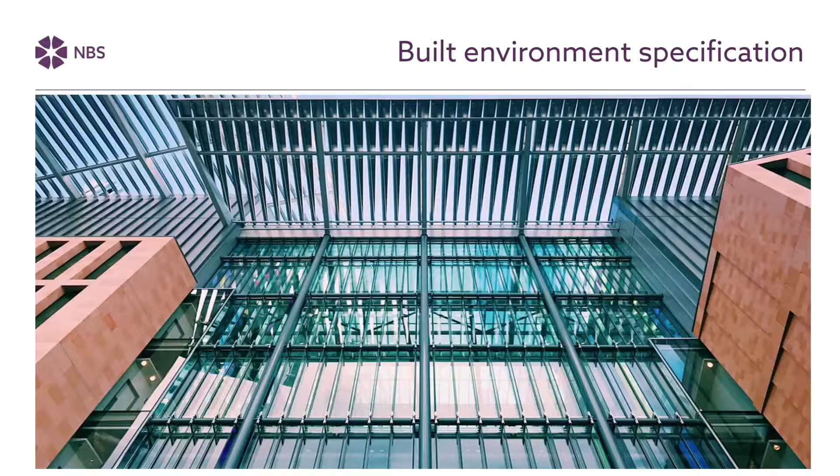For the built environment, the specification is most often a document, but is increasingly now a data model or a database connected to model information, helping to ensure that the constructed entity - which could be a building, but could be another kind of asset like a park, a tunnel, a bridge, even an art installation - is of suitable quality and meets the expected design intent.

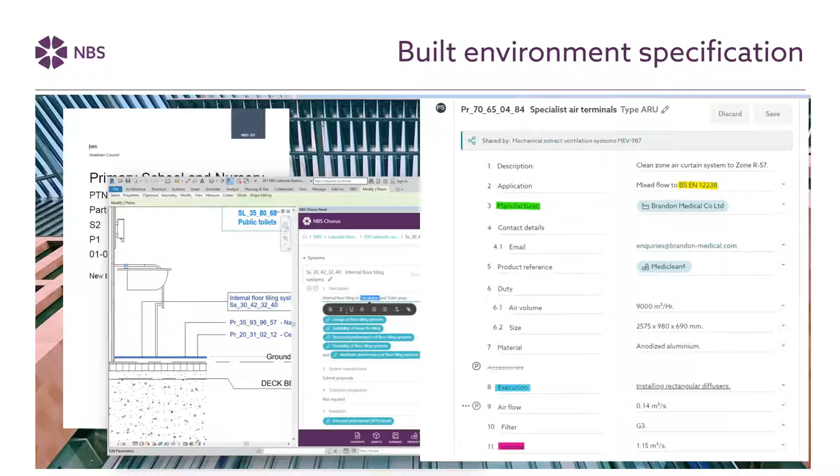The specification defines products and materials to be used, the standard of work required, any performance requirements that need to be met, and the conditions for carrying out the works. Ideally, it should be developed in parallel with the rest of the design process, not just part of the completed design, but forming part of the contractual and handover information for the rest of the project.

So that might describe what a specification is, but it's also worth noting what a specification does not include. The project specification is a written description, and as such, in most cases, it does not include graphical or geometric information. This is best represented in drawings and models in combination with the spec.

John Gelder, in his book Specifying Architecture, calls this the components of the description of the works, and suggests that almost always both graphical and non-graphical information is necessary. The text information provides the definition of quality and process, and the drawn information the quantities, position, assembly, and extent. Often on small projects, drawings used to be annotated, almost like a replacement of the specification, but this is impossible for larger projects, and even on small projects it's really difficult to keep things updated as things change.

Nor does the specification generally include information on quantities of materials, variants of many repeated items like fan coil units or louvers, which are better expressed in schedules generated from the model information, and often bills of quantities or pricing reports provide cost data, so that tends not to be in the spec either.

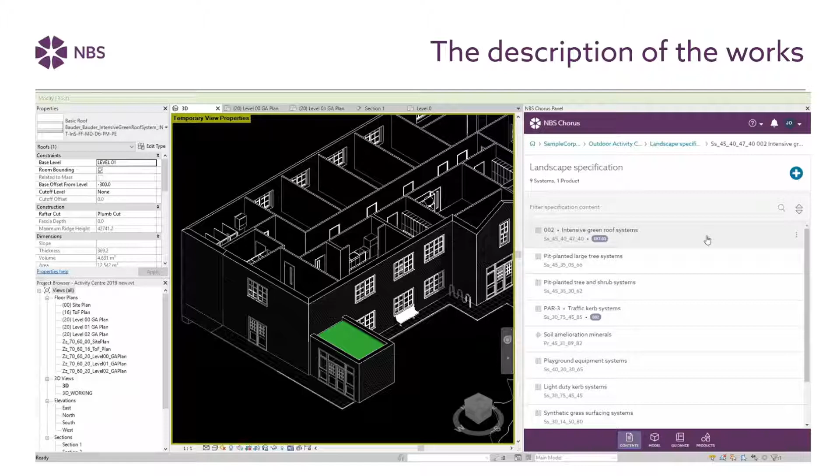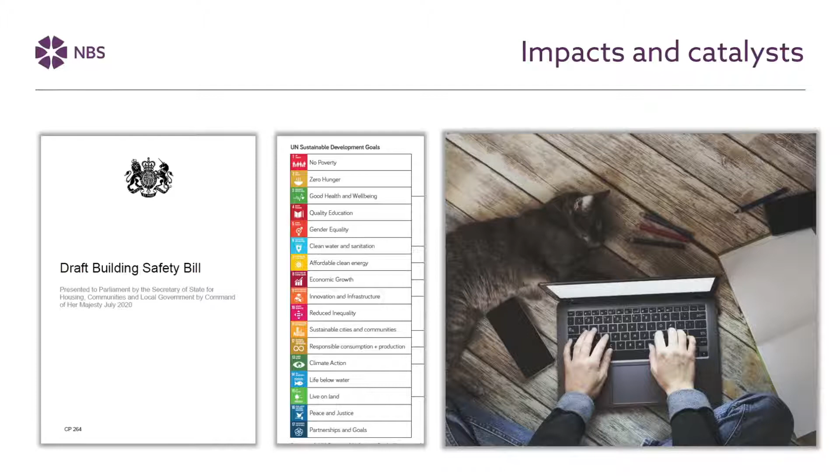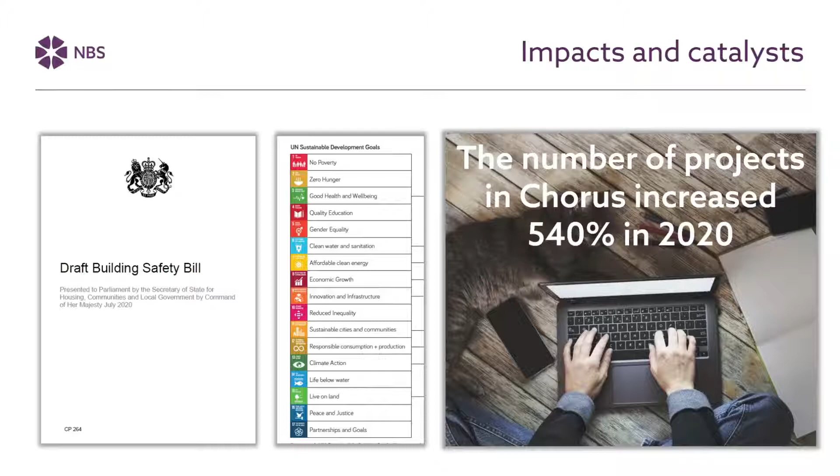There's always changing factors that impact and accelerate the work that NBS do, and recently regulations and mandates such as the draft Building Safety Bill, helping you to build safer and provide the golden thread of information, influence the content of NBS. Also, sustainability credentials, ensuring we provide standards and guidance on targets and requirements towards the sustainability goals, but also industry, society, carbon calculation, reducing cost and water consumption. And finally, digital transformation. There's been a real workplace evolution, and there was a huge increase in Chorus usage across 2020, working from home access being a major catalyst there.

So why are specifications so important? What can go wrong? In 2007, a luxury house in Jersey was demolished, having sat unused for 5 years. The building had failed to meet the owner's expectations, and the owner sued the contractor, the architect, the engineer, and the project manager for a catalogue of errors.

One of the significant issues raised was the lack of project documentation, in particular a written spec. As there was no written specification for the project, the architect was found to be liable for the failing and damages were sought. That's a major example of project documentation failure, but it helps to demonstrate the importance of a spec to ensure that the client's requirements are properly documented and met.

There's examples of significant building failures like this in a range of public sector and private projects up and down the country. Specifications are vital in times of dispute, but their fundamental purpose is to provide a clear and complete written description of the works as part of the contract.

And now there's even more urgency around improving various aspects of the building industry as a result of the London Grenfell Tower fire in June 2017, when 72 people lost their lives. This has brought a renewed, increased attention to specification, performance and quality.

And in the shadow of Grenfell, a major independent review and report, the Hackitt Report, was commissioned. That report, Building a Safer Future, concluded that the current system for ensuring fire safety, specifically in high-rise buildings, was not fit for purpose and recommended a full overhaul. And the government has accepted all 53 of those recommendations, and that has led towards the draft Building Safety Bill.

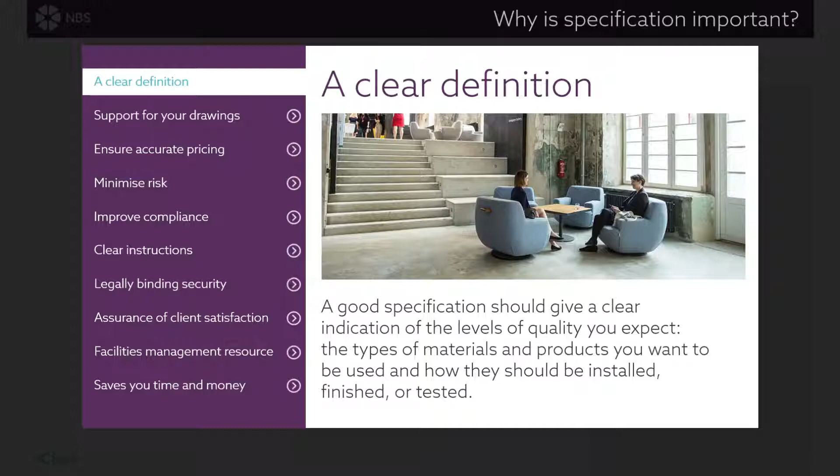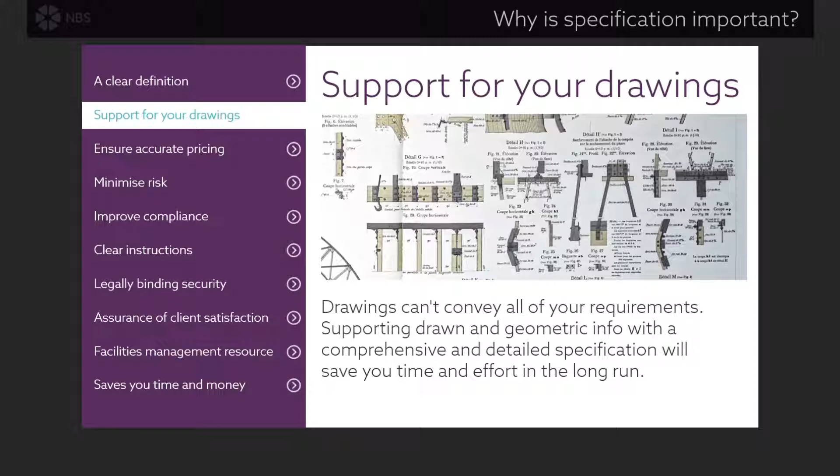Drawing info can't convey all of your requirements. Even on BIM projects using the latest platforms where fully rendered designs contain all kinds of information, only specification can capture the quality of materials, workmanship and installation, relevant standards that need to be met, and many aspects which are never modelled, like mortar, wall ties, brackets and joints.

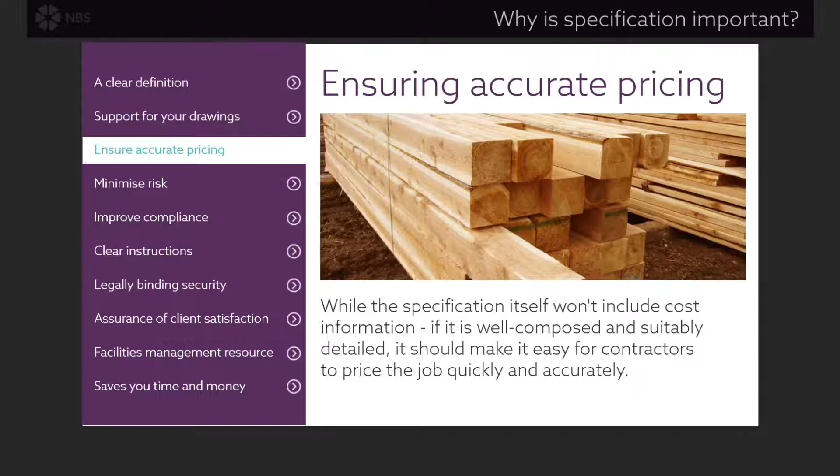Specifications shouldn't include cost information, but if well composed, structured and detailed, it's easy for a QS or contractor to price the job quickly and accurately. Expectations on performance and minimum levels to be achieved result in more accurate pricing down the line. If you can make reference to specific local standards or testing that are applicable to the job, they could impact cost too.

Performance and quality can be cross-checked against the latest standards. If you're not keeping the specification references up to date or coordinating the model information, it becomes easier to challenge it and harder to enforce.

Also, it has been tempting for organisations in the past to provide specs full of general clauses from previous projects or the whole of NBS content as a perceived safety net or catch-all. NBS templates are designed to be adapted, parked, edited, removed for the specific needs of your project. It makes no more sense to keep in clauses that you don't need or to understand than to send drawings of every detail you've ever designed. If in doubt, leave it out.

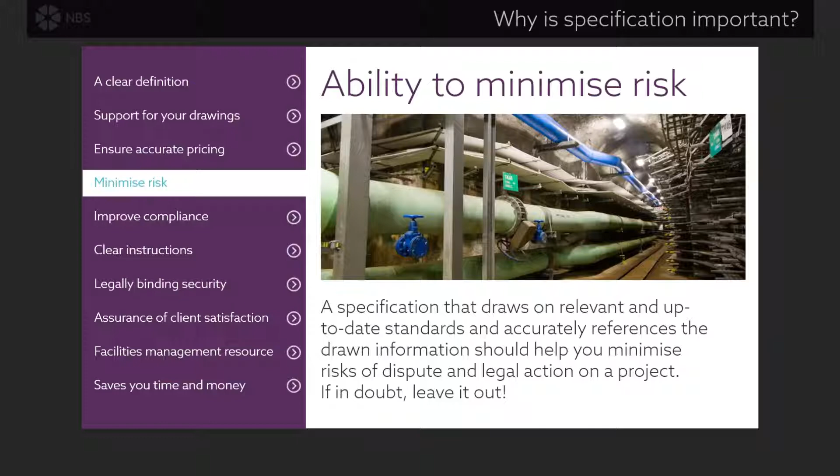Improving statutory compliance through the spec helps you avoid the legal implications or penalties and can reduce the risk of prosecutions. Defining requirements for specific standards, sustainability benchmarks or compliance with health and safety, and then adding the execution and verification will assist a project manager in determining and verifying that requirements have been met through testing.

A good specification should serve as an on-site instruction manual. In stating clearly the standards you expect the workmanship to be completed to, you're effectively providing guidance for those working on the job to follow.

The specification should be available on-site as a reference guide for those standards. The specification itself should not specify method. The focus should be clearly on outcomes rather than the process by which they're achieved.

We've touched on how you're better protected from risk by creating a robust specification, but specification also forms part of the contract documentation and therefore becomes legally binding in the event of any litigation. Hard coding specification requirements makes them harder to dispute and demonstrates you are considering the risks and issues ahead of time, clearly indicating your design decisions in writing. I hope you never do, but should you find yourself in the unfortunate situation where there was a dispute on your project, if you easily and quickly have a specification to hand, assuming it is correct and clear and accurate, you're in a stronger position to discuss what happened.

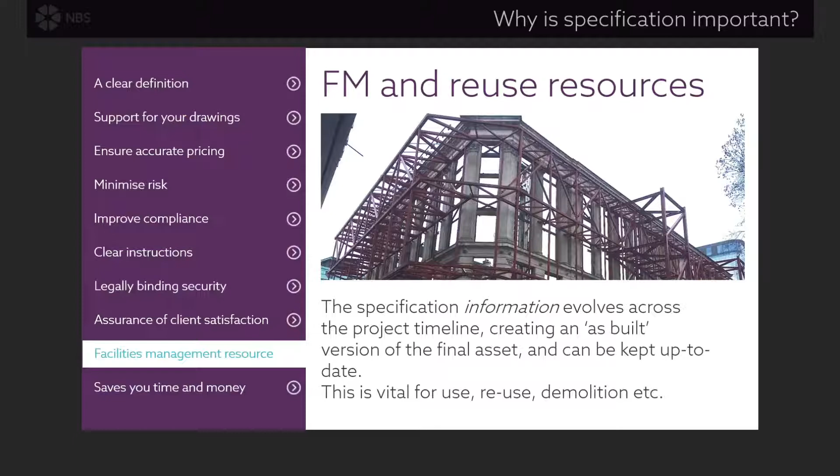Taking the time to collate accurate information, clear instruction, and minimal repetition will allow the contractor to proceed with little disruption, which tends to save time in the long term. Better specifications often reduce the need for questioning and meetings, often to clarify something that wasn't made clear or needs to be checked or discussed in detail, all of which adds time and costs to a project.

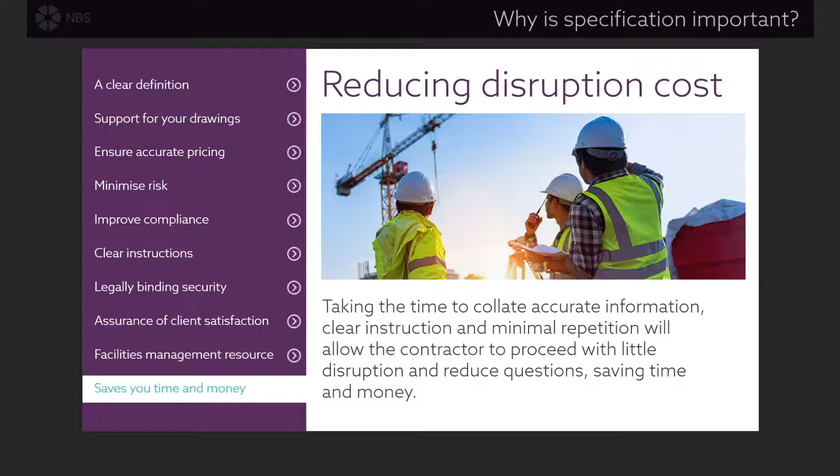In this section, we'll look at NBS Chorus in a moment and consider the types of specification we can develop.

Our recent digital transformation demonstrates that we are capable of massive change. Moving to the cloud, as so many of us have done with many different products, means there's nothing to download, there's nothing to install, these platforms are accessible anywhere, and we're no longer tied to a desk to specify. We could be using a tablet on site, for example.

It also used to be the case that there'd be a spec writer, often in the corner of the office, and that still persists in some practices and organizations, and in North America too. But Chorus is designed for collaborative projects, bringing the spec into the core of the design process and enabling everybody in the project to work together within the same project or on the same specification. And it's important to keep those skills developing and to communicate between the project members.

NBS have been doing this same work of standardizing the specification process and providing robust technical information with our authoring teams for over half a century. In 2023, we'll be celebrating 50 years since NBS was published, and every day has demonstrated a desire to innovate, improve, react, preempt, and make the industry better.

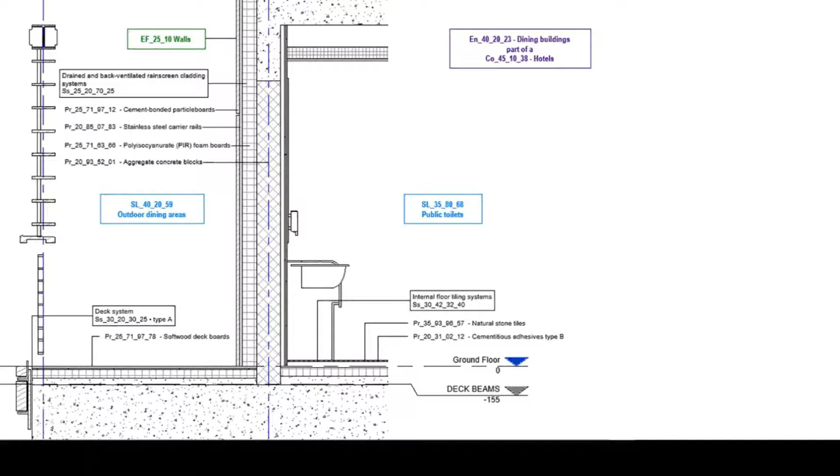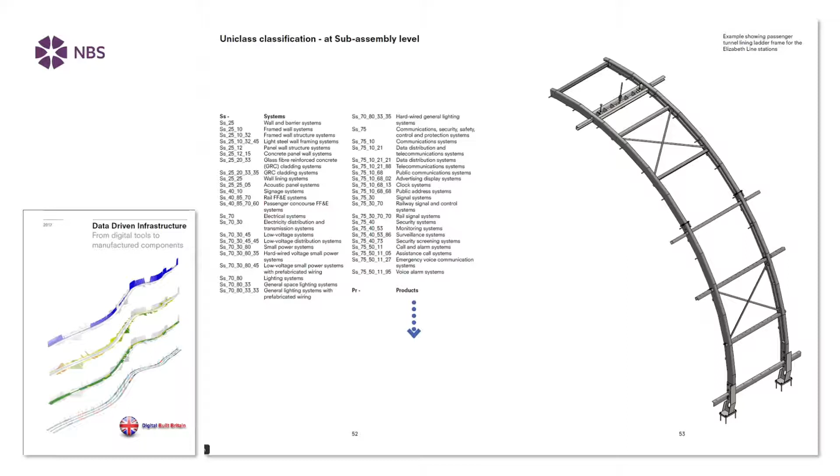There's some great examples of Uniclass in use out in the public domain. In particular, I'd recommend this Bryden Wood report on data-driven infrastructure for the Digital Built Britain project, which shows Uniclass being applied at every level of two particular projects, in this case the Elizabeth line for infrastructure, showing all of the various systems, products, components and how they are classified.

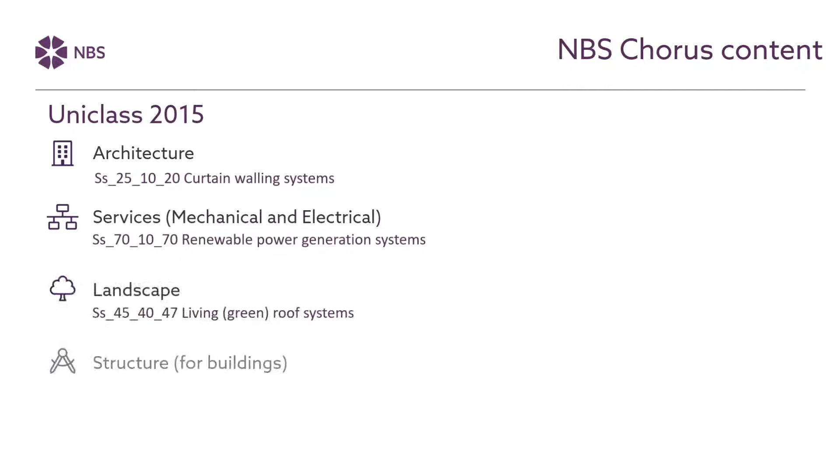NBS Chorus has been designed to be classification agnostic, that is, the platform is capable of supporting content in a range of classification structures. Although the UK content is natively classified to Uniclass 2015, other classifications are available too. It's important to note that Uniclass isn't sector specific, that the same coding is used for architecture, services, landscape and structural content, so that content for M&E engineering specifications, HVAC, drainage, fire extinguishing and power generation systems all have their own individual codes.

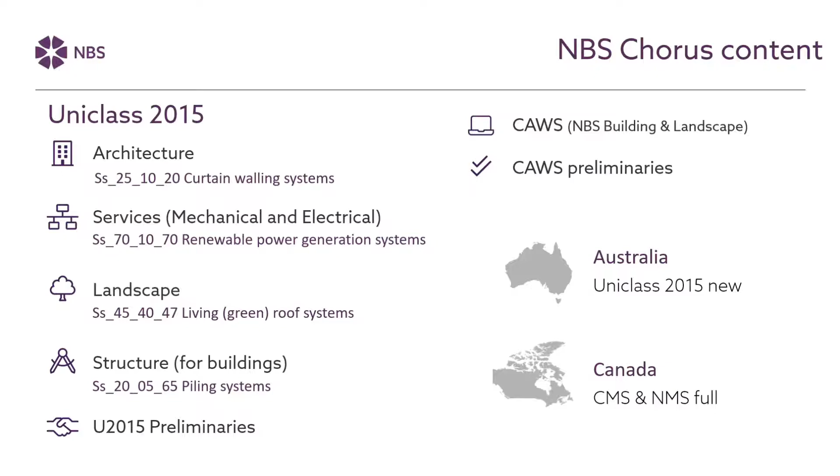Next up are a set of core editorial principles that you can use when developing your specifications, such as using clear language, specifying end results, and thinking about the formatting.

A key principle in NBS specification has always been say it once in the right place, because information can otherwise end up being duplicated. This tends to be common in information that appears in both the model and the specification, or the specification and separate schedules, or the contract and the spec. Keeping graphical information in the model and written content in the spec means you're avoiding repeating the same product or requirement more than once. Even within the spec, duplication can lead to inefficiencies in changing or updating that content.

With NBS Chorus, it allows you to write a clause once and then cross-reference it through intelligent linkage and reporting. Say that you had some trunking or conduit, it would allow you to cross-reference that information through intelligent linkage across the rest of the spec. Because the information model is a database of connected data, this key phrase could perhaps be updated now to say: say it once in the right place, but report it anywhere. It's the same piece of data that you're referencing back, not a new duplicate of it, especially in the model information.

Language is so important in specs. Keep the spec concise, remove phrases like "the contractor shall do the following" and other long sentences. Like any document, for many readers, it needs to be clear and simple.

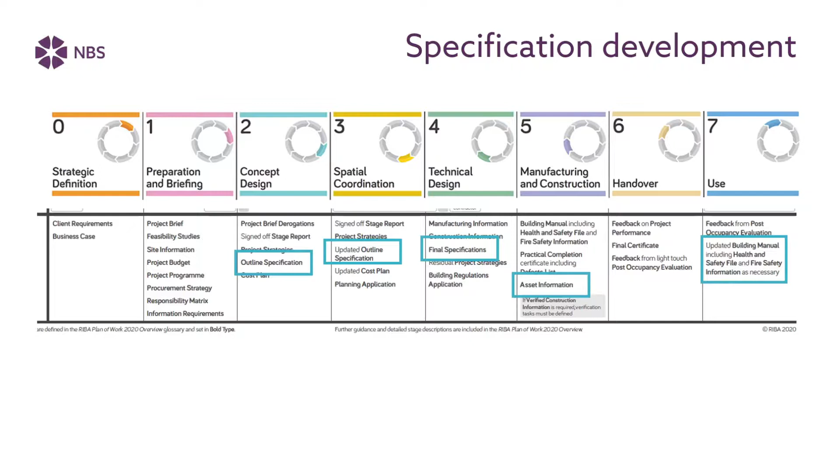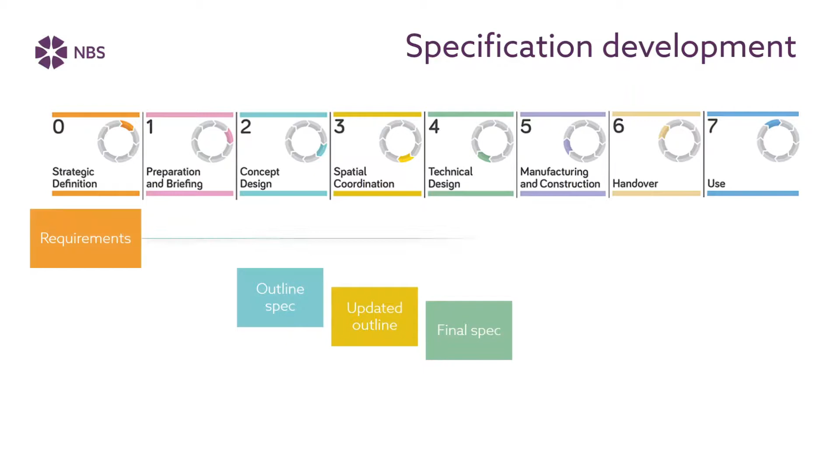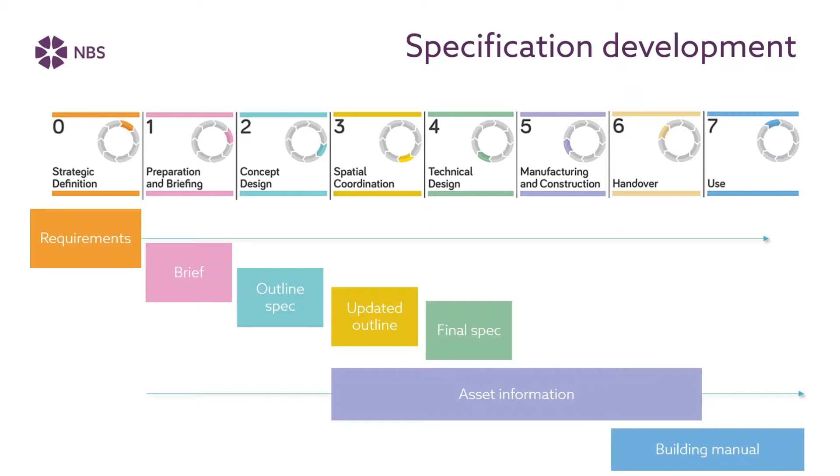This evolution of the specification advances the documentation and model, inputting information as the design advances. These versions of the specification are developed, perhaps as documentation, but you should be able to refer everything back to the original client requirements and also feed everything forward into the asset information required for the golden thread, like building manuals and maintenance information.

So early on, say at the end of concept design stage, you know that you're preparing descriptive specifications for the ductwork and ventilation systems, but prescriptive specs for lifts and escalators to ensure that their sizing is correct. There will be this mix of descriptive and prescriptive specs when it comes to tender. Ultimately, everything turns into a prescriptive spec as it's all fully designed prior to being built, and that information should be updated and produced into record specifications.

Previously, it was understood that some of that technical design would overlap, recognizing packaging and the increase in specialist subcontractor design as the project information developed. But the draft Building Safety Bill process and new regulation may influence greater scrutiny of the information available at distinct gateways before the project can proceed further.

Finally, let's consider how specification is becoming a key part of a wider information model, alongside BIM processes and data development.

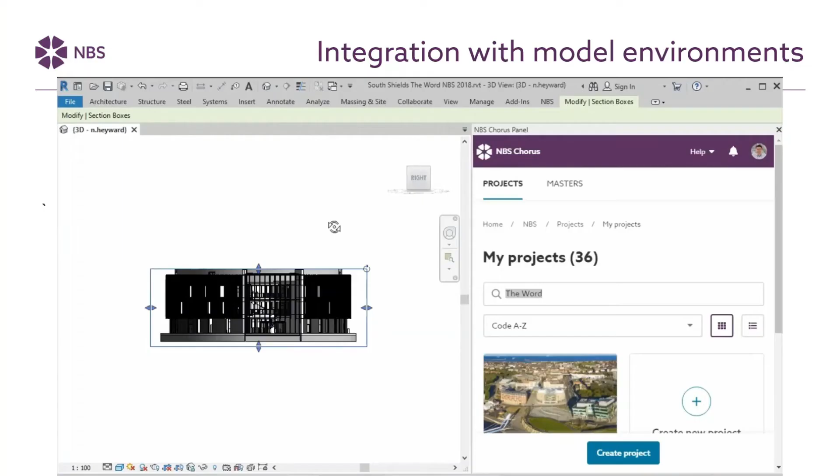The last decade has seen such rapid change and development in construction technology, process and procurement, all of which has an impact on specification. Technological developments in computing and modelling have had a major effect on the direction of specification writing. Specifications have to work effectively within 3D CAD platforms and your workflows.

Traditionally, specification writing was done after much of the model information was fairly well developed, but now the spec can be kept in sync all the way through the process through plugins like our NBS Chorus one here, and evolve to describe what you're designing.

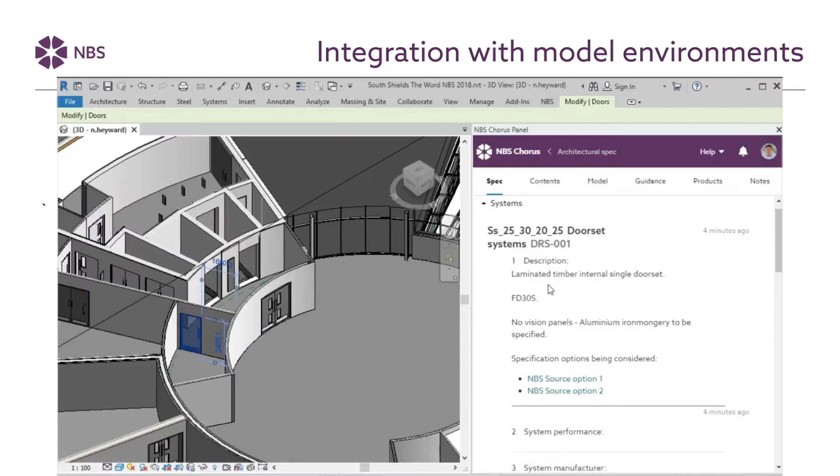NBS plugins are available for Autodesk Revit, Graphisoft ArchiCAD and Vectorworks to help make specification decisions in context with model information, objects and details for users of those vendors, and we're working to add more to that list in time.

NBS Chorus now also supports submittal reports for common data environments like BIM 360, Newforma and Viewpoint, and that's the first step in being able to integrate further with CDEs like those and BIM processes to a greater extent.

If this CPD has been of interest, there's an article on our website called Construction Specifications, which I'd recommend you check out, containing some helpful tips and guidance on good specification writing.